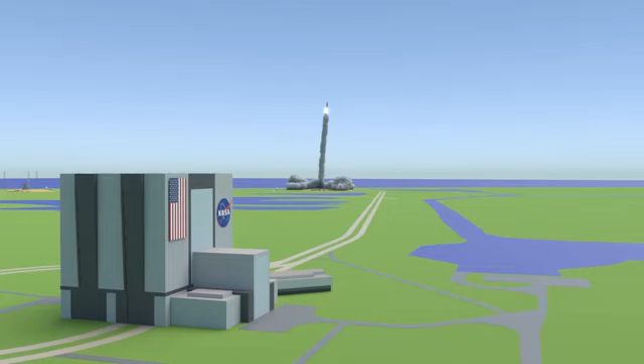In this video, I want to show you how they launched the space shuttle. We'll look at all the preparation beforehand, then the details of the launch pad, and then their 8.5-minute journey into space.

Sadly, the space shuttle is retired. It no longer flies. However, I think it's still really important to learn about. After all, some of this technology is still being used for space programs.

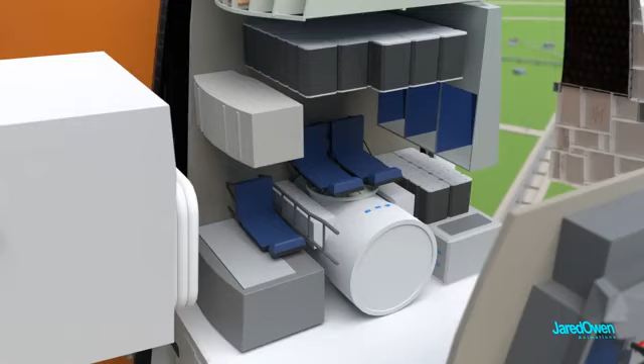In preparation for this video, I read a few books. One of them was called Riding Rockets, and it was written by 3-time astronaut Mike Mullane. He does a good job of capturing what it was like to ride on the space shuttle. I reached out to Mike and he was really helpful. He made a lot of good suggestions for what to include in this video.

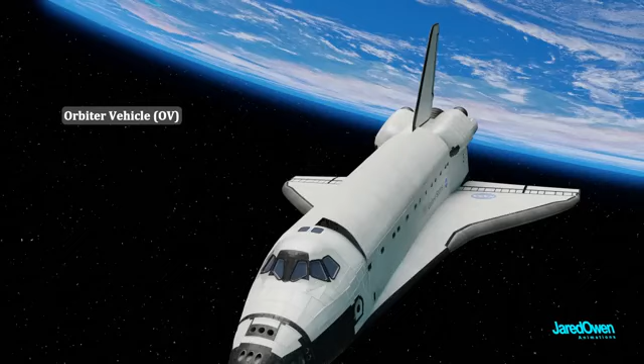Though before we get too far, let's review. This is the orbiter vehicle, the part that looks like an airplane and carries the astronauts and payloads into space.

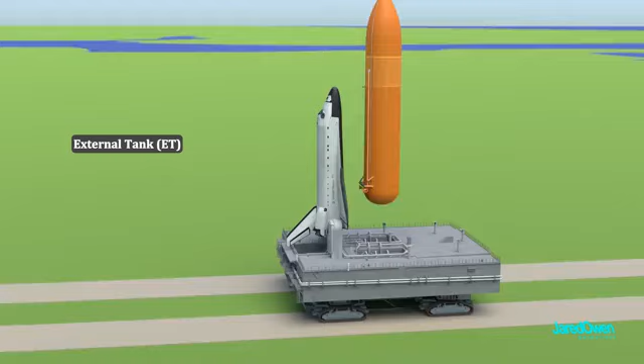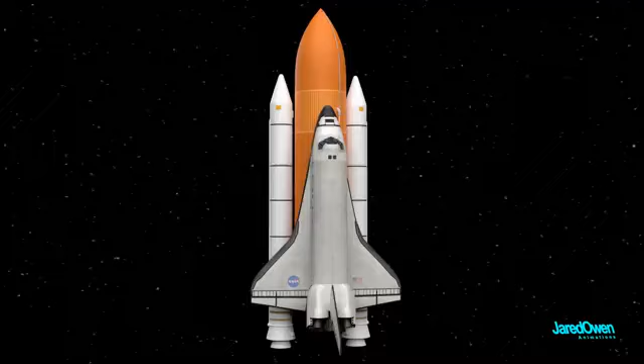It takes so much fuel to get into space that we need a really big gas tank. That's what the orange external tank is for. It provides the fuel for the 3 space shuttle main engines. Even this isn't enough to launch us into space. We need 2 extra rockets, one on each side. These are called the solid rocket boosters, or SRBs. It takes a lot of work to get all of these pieces ready for the launch.

There were 2 launch sites for the space shuttle: Kennedy Space Center in Florida and Vandenberg Air Force Base in California. Shuttle launches from the Vandenberg site ended up being canceled, and as a result, all 135 shuttle missions were launched out of Florida. So let's take a closer look at Kennedy Space Center in Florida. It has 2 launch pads, 39A and 39B. Shuttle missions were launched from both of these pads.

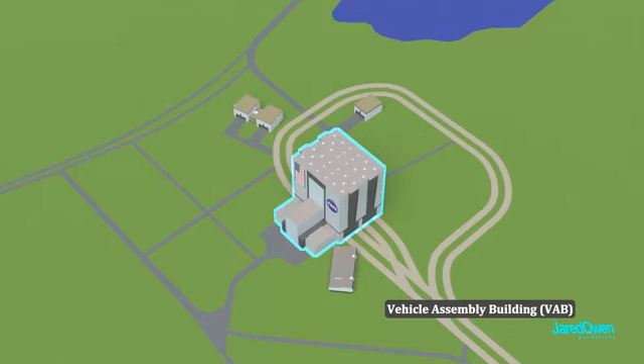There's a few buildings way over here, about 5 kilometers away from the pads. The large one here is the Vehicle Assembly Building, or VAB. It's as tall as a 52-story building. This is where they would assemble the space shuttle in preparation for a launch. Next to it is the Launch Control Center. Notice how it's positioned with a good view of both launch pads.

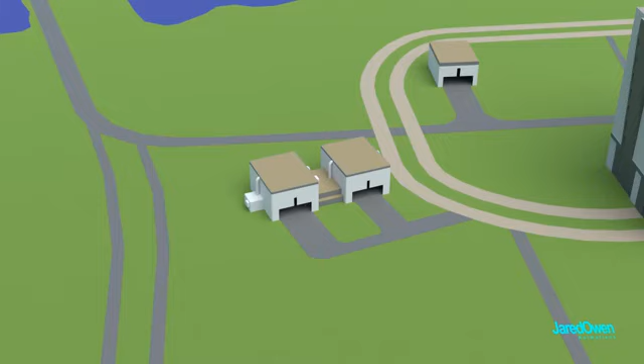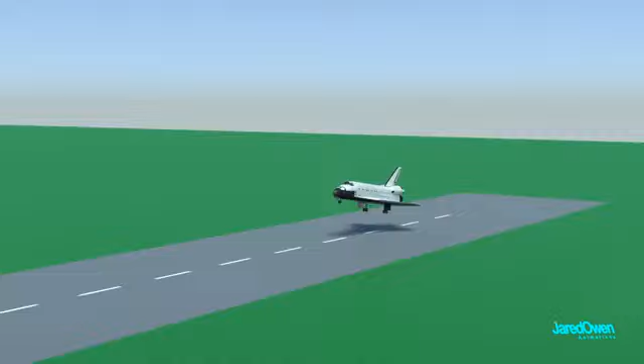This building is called the Orbiter Processing Facility, or OPF, and actually there were 3 OPF buildings. It's where the orbiter was serviced in between missions. Over here is the Shuttle Landing Facility. This is where a mission ends for the space shuttle. But they didn't always land here. Sometimes, due to weather or other circumstances, the shuttle would land in California at Edwards Air Force Base.

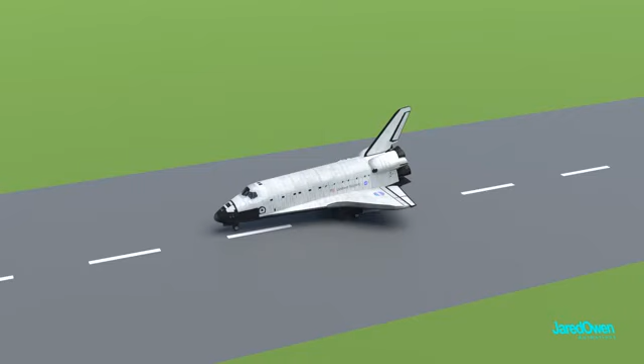When this happened, we need to get the orbiter vehicle all the way back to Florida, and the shuttle can't really take off again and fly like an airplane. It wasn't built for that. So here's what happened. The orbiter vehicle was taken to the Mate-Demate device, or MDD, which would lift up the shuttle and then load it on the back of a special airplane called the Shuttle Carrier Aircraft. It was then flown across the United States to get back to Kennedy Space Center in Florida.

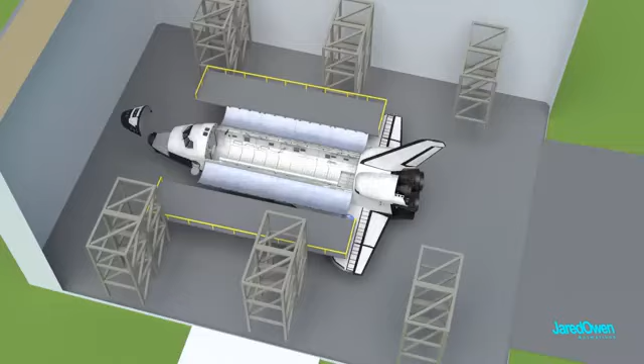It was then taken to one of the OPFs. Once inside, the engineers would literally crawl all over it to fix or replace many of the shuttle components to make sure that it's safe to fly for the next shuttle mission. This process can take several months to complete. This is part of the reason why the space shuttle was so expensive.

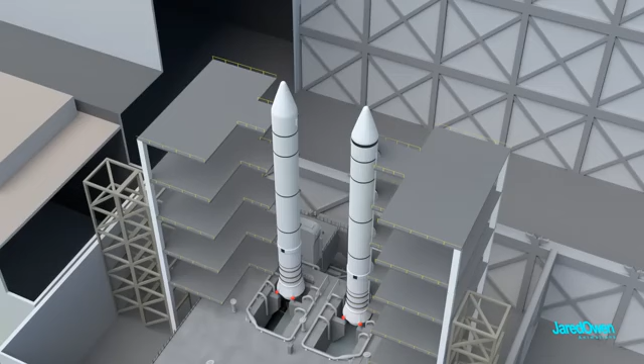Meanwhile, work starts over here at the VAB. We start with the solid rocket boosters, which are assembled piece by piece. On the inside is the solid rocket fuel. Once ignition starts at liftoff, it cannot be turned off. Now it's time to lift the external tank into place. Inside, there are 2 smaller tanks, one for liquid hydrogen and one for liquid oxygen. These tanks will remain empty until just a few hours before the launch.

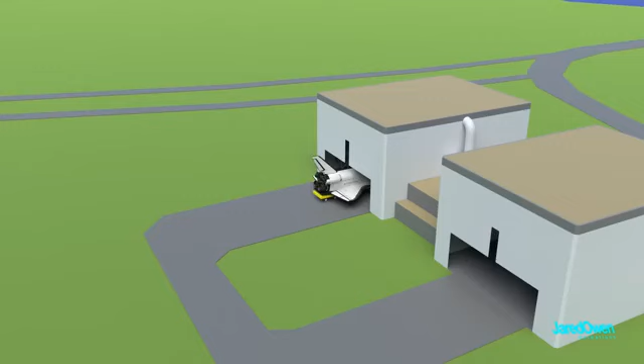Now at room temperature, hydrogen and oxygen are both gases which take up an enormous amount of space. But if we put them at extremely cold temperatures, they will turn into liquids and we can put a lot more fuel inside of the tanks. The liquids from each tank will flow through pipes down to where it will connect to the orbiter. This side is for the liquid hydrogen, and this side is for the liquid oxygen. Once the orbiter was ready, it was then transferred from the OPF to the VAB. This was referred to as a rollover.

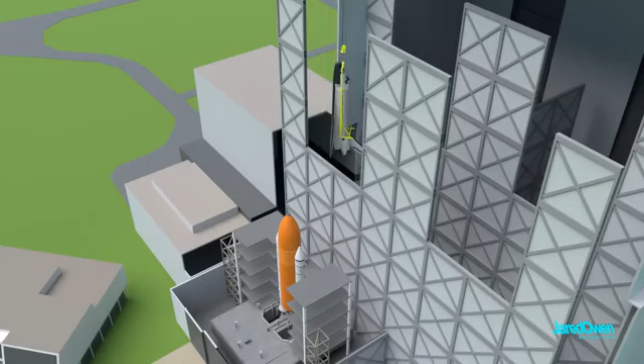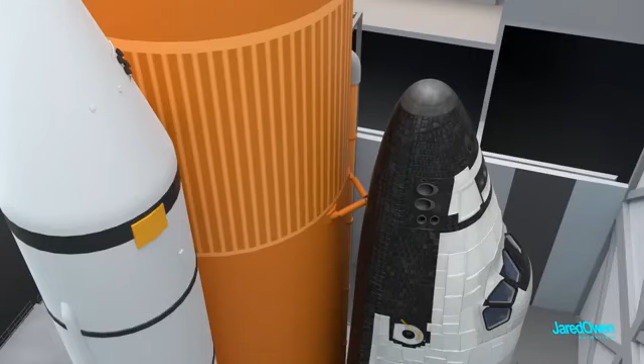The orbiter was then hooked up to a crane and then carefully lifted up, moved over to the high bay, and then mounted to the side of the external tank. The fuel and electrical connections are attached to the bottom of the orbiter. There is also another attachment point up towards the top.

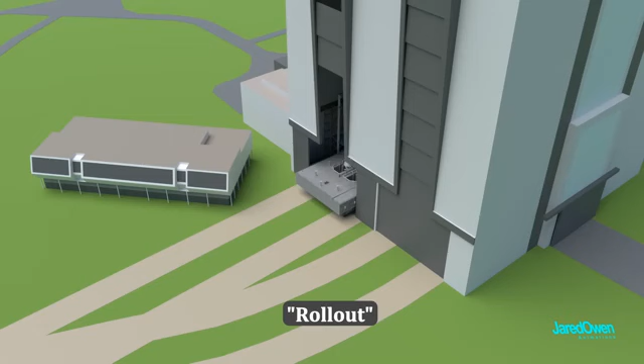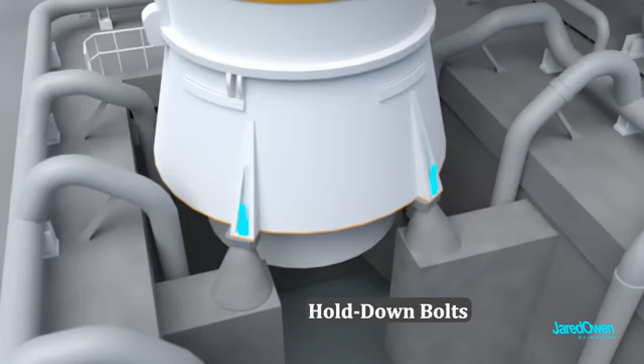Once this is all ready to go, we need to move it to one of the launch pads, which are more than 5 kilometers away. This is referred to as the rollout. The weight of the entire shuttle stack is supported at the base by 8 hold-down posts, 4 on each of the SRBs. It's then secured in place by the hold-down bolts. At the moment of liftoff, these will detonate to free the shuttle.

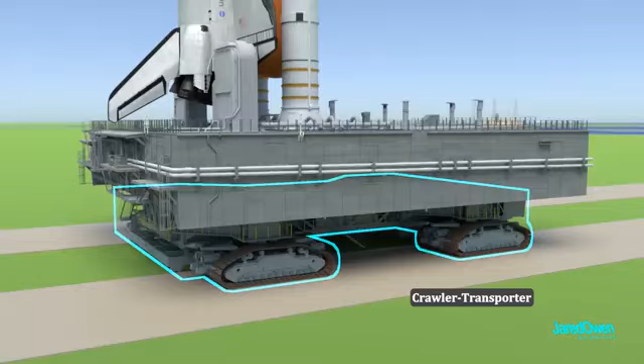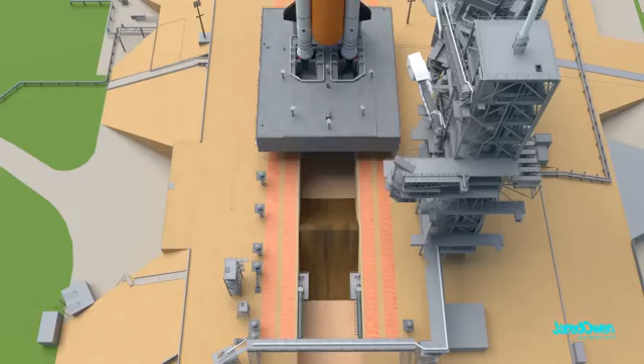The platform it's on is called the Mobile Launch Platform. Underneath is the crawler transporter, which moves everything at just under 1.5 kilometers per hour. It takes many hours to get all the way to one of the 2 launch pads. Then it's up the ramp and slowly into position. The platform is put down on supports, and the crawler goes back down the ramp.

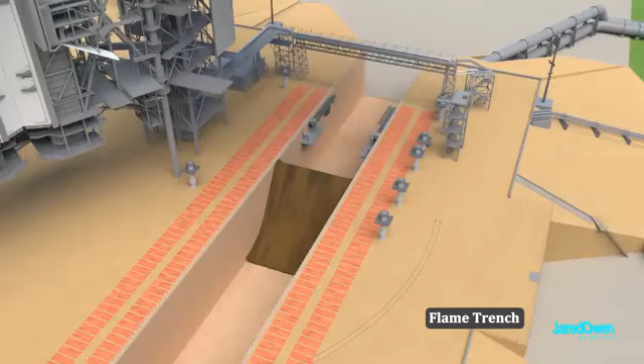The mobile launch platform has large holes for the rocket flames. The 3 main engine flames will go through this hole, and the flames from the 2 SRBs will go through these 2 holes. Below the pad is the flame trench. During the liftoff, the flames will be deflected to each side.

The structure next to the shuttle stack has 2 main parts: the fixed service structure, which doesn't move, and the rotating service structure, which can pivot around to completely enclose the space shuttle. Sometimes the payloads were loaded here in the vertical position, and other times they were loaded before this, when the orbiter was on the ground at the OPF.

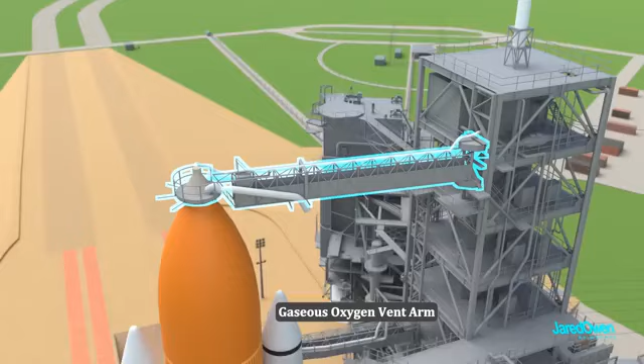The fixed service structure has a lightning mast on top, and then 3 service arms. 2 of them are vent arms, which will collect excess hydrogen and oxygen from the external tank. This is the gaseous hydrogen vent arm, with the ground umbilical carrier plate at the very end. At the top is the gaseous oxygen vent arm. Because the fuels are so cold, the beanie cap is really important to prevent ice buildup at the very top.

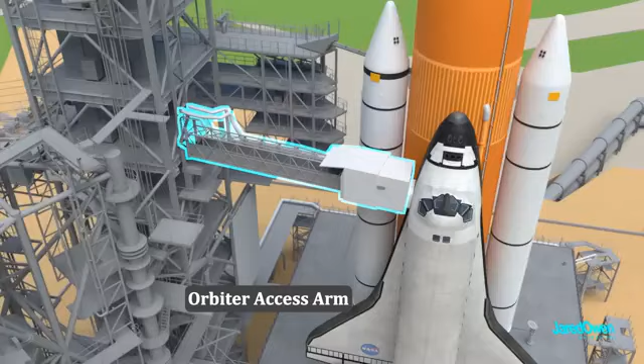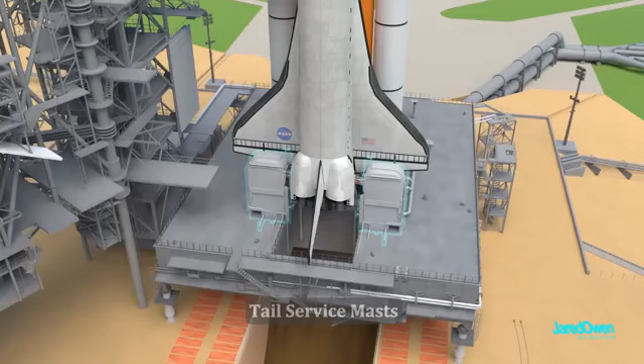The third arm is called the orbiter access arm. At the end of it is the white room. This is how the astronauts get on board the orbiter in preparation for a launch. Down here are the 2 tail service masts. They have connections to each side of the orbiter. On the day of the launch, this is where the fuel will come in to fill the orange external tank.

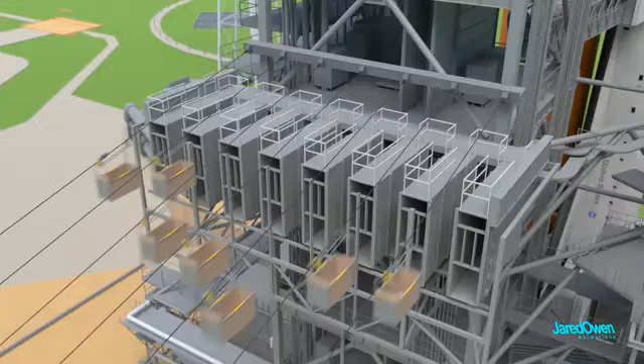If there is an emergency on the launch pad and the astronauts need to get away in a hurry, they will come over here to the emergency egress system. It has several baskets that can quickly carry them far away from the launch tower. Each basket can hold 3 people.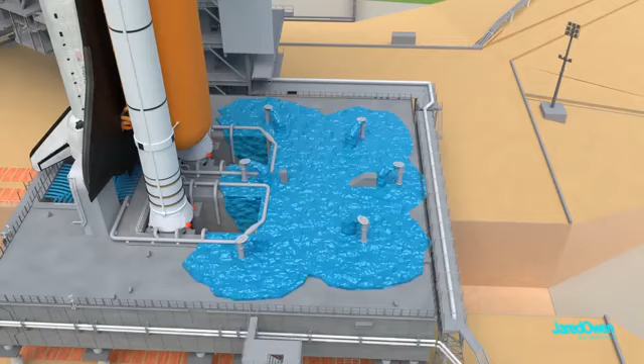One more feature of the mobile launch platform is the sound suppression system. Beginning at just a few seconds before launch, water will start pouring out from a few different places. This will limit the sound shockwaves from bouncing back up and damaging parts of the space shuttle as it leaves the ground. The water is stored in this large tower on the launch pad.

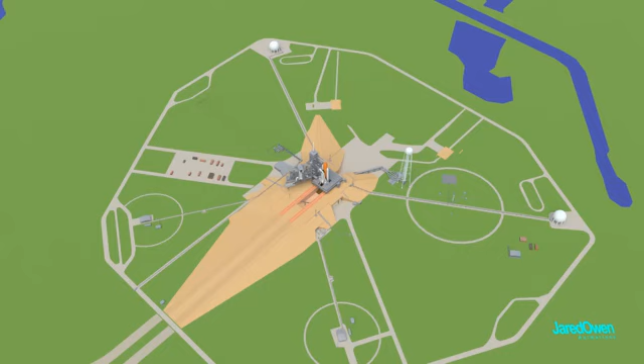So let's see how this works on the day of the launch. There are many things that have to happen in order. I can't cover them all in this video, but let me show you some of the main ones. At T-minus 5 hours and 35 minutes before the launch, fuel begins loading into the external tank. The fuel comes from the white spherical tanks on the edges of the launch pad. Remember that the SRBs already have their solid fuel inside of them.

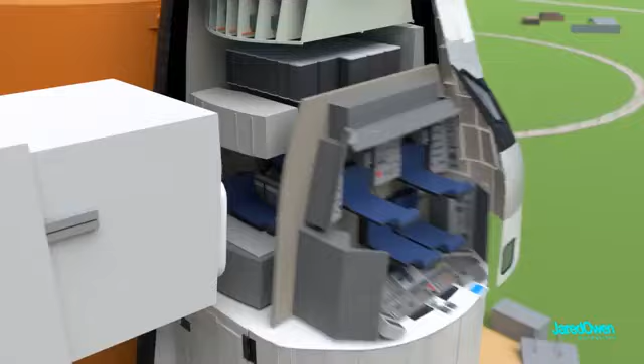At T-minus 3 hours, the astronauts leave for the launch pad and begin to enter the orbiter vehicle. Since the shuttle is vertical on the launch pad, all of the seats are in the laid-back position. Most missions had 7 astronauts, 3 in the middeck and 4 in the flight deck. There are no windows on the middeck, so some of the astronauts won't be able to enjoy the view on the way up.

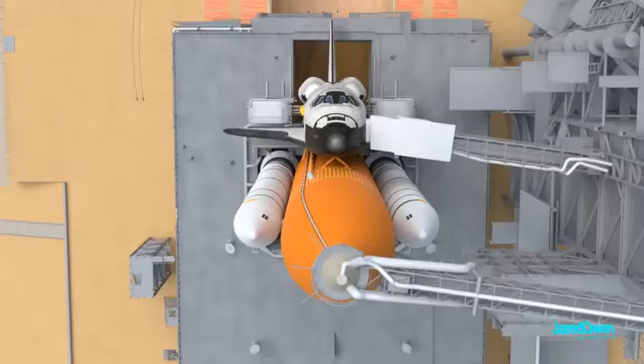There's a lot of excitement coming up to the moment of liftoff. However, if there are any problems such as mechanical failures or even bad weather, then the launch will be delayed or even canceled until another day. This is called a launch scrub, and it can happen all the way up until just a few seconds before liftoff.

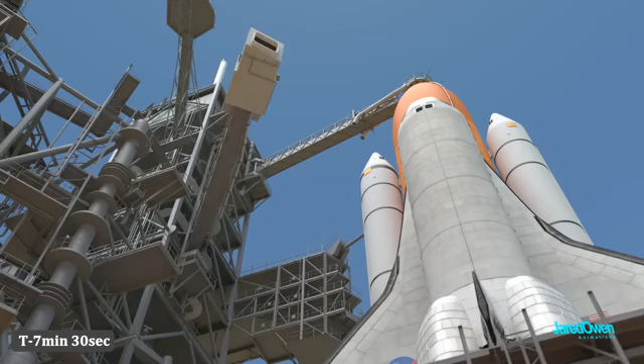At T-minus 7 minutes and 30 seconds, the orbiter access arm is slowly retracted. If there is an emergency, they can quickly bring it back into place. At T-minus 3 minutes and 45 seconds, the main engine gimbal tests to make sure that it's working correctly. T-minus 2 minutes and 55 seconds, the beanie cap is lifted and the gaseous oxygen vent arm is retracted.

At T-minus 10 seconds, activate the hydrogen burn-off system. And no, this does not actually start the engines. That happens up here inside of the combustion chamber. What these sparks do is ignite any excess hydrogen. This hydrogen can cause an unexpected explosion at launch if it isn't taken care of.

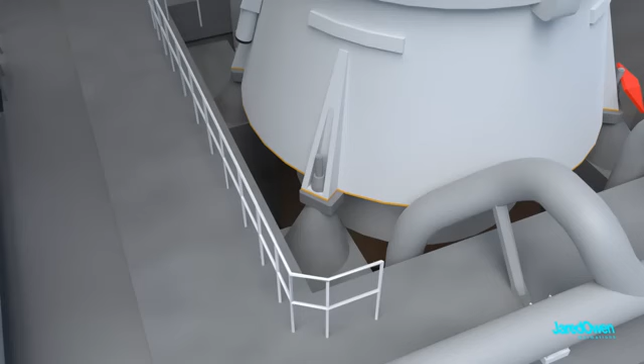At T-minus 6.6 seconds, the 3 main engines ignite. All 3 of them must work correctly or they will shut down and abort the launch. At the moment of liftoff, many things happen simultaneously. The gaseous hydrogen vent arm is retracted from the external tank. The 2 connections at the tail service mast will retract. The 8 hold-down bolts will detonate, which frees the shuttle, and then both SRBs ignite.

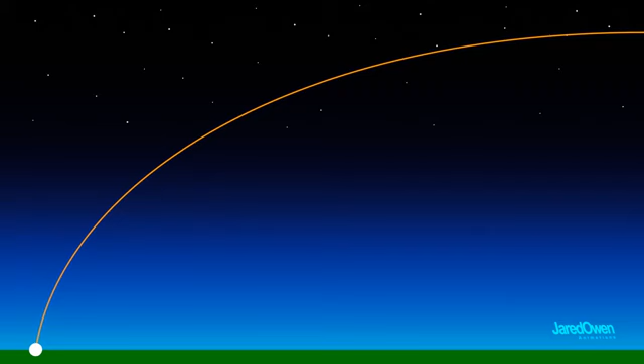For their journey into space, the shuttle is mostly flown by the autopilot. Of course, the astronauts can still take over if they need to. Shortly after clearing the tower, they do what's called the roll program, to get the shuttle so that it's heads down for most of the ascent into space. This reduces the aerodynamic stress on the wings. It will also allow the astronauts to see the curve of the Earth as they ascend into space.

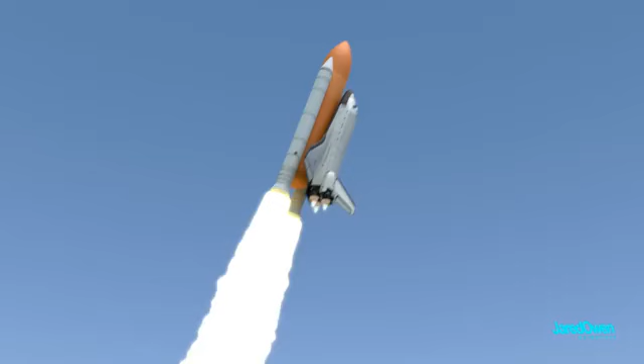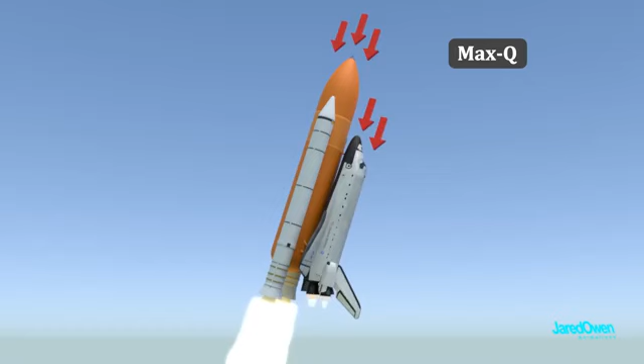Now, as we keep gaining more and more speed, the air in the atmosphere will create pressure on the front of the spacecraft. Then as we get higher, the air starts to thin out. They use the term max Q to refer to the time when the aerodynamic pressure will be at its highest. During max Q, the main engines will be throttled down, so we don't accelerate too quickly, but then shortly after we can throttle them back up again.

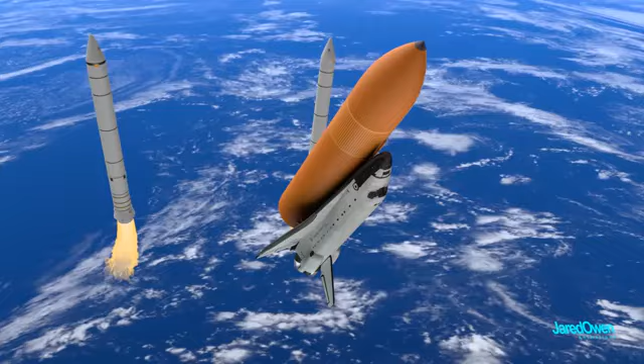A little more than 2 minutes after liftoff, the 2 SRBs have done their job. They are detached, and then small rocket motors on the bottom and on the top fire on each booster to ensure that they are separated from the vehicle. The SRBs fall back down to the Earth where they will parachute in for a soft landing in the ocean. They will be recovered by boat and then refurbished for a future shuttle mission. Now the 3 main engines are on their own.

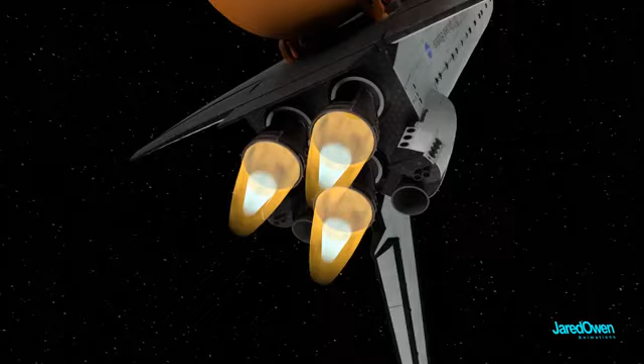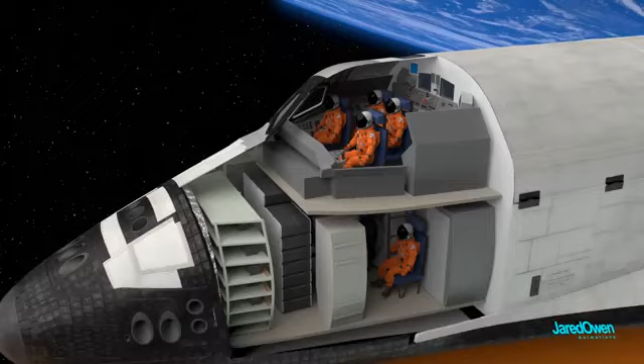As we get higher, more and more fuel will be used up from the external tank. This means that the shuttle will keep getting lighter. We have to keep throttling down the engines or we'll accelerate too quickly. The maximum amount of acceleration we want the astronauts to feel is 3 Gs, or 3 times the force of gravity pushing them into their seats.

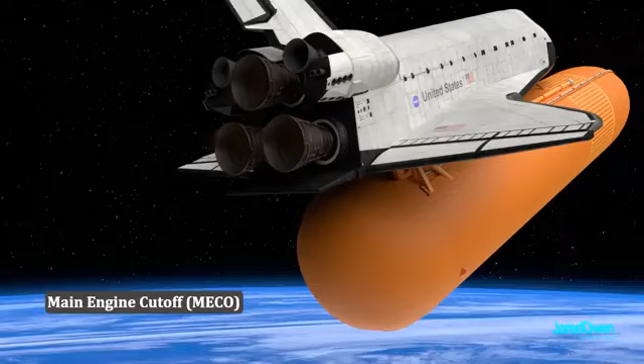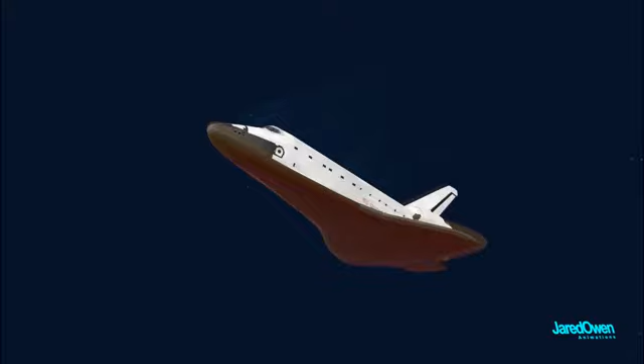At about 8 minutes and 30 seconds, we have main engine cutoff, or MECO. This must happen before the tanks run dry so that the engines aren't damaged. The external tank is now detached. We're not in orbit yet, so the tank will head back down to Earth and burn up in the atmosphere. The 2 doors on the bottom side of the shuttle will close now that the external tank is gone. If they didn't close, we would have gaps in the heat shield at the end of a mission, which would not be so good.

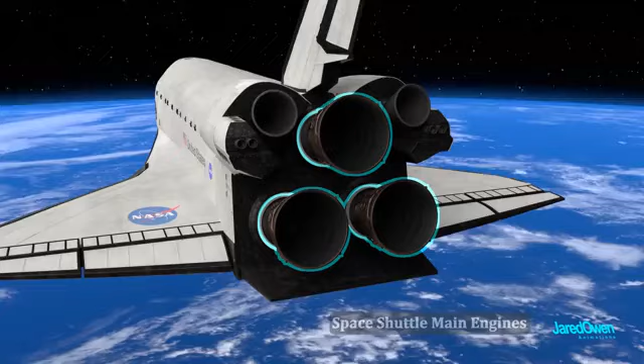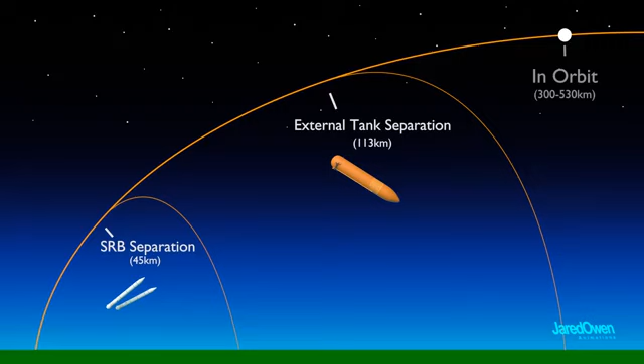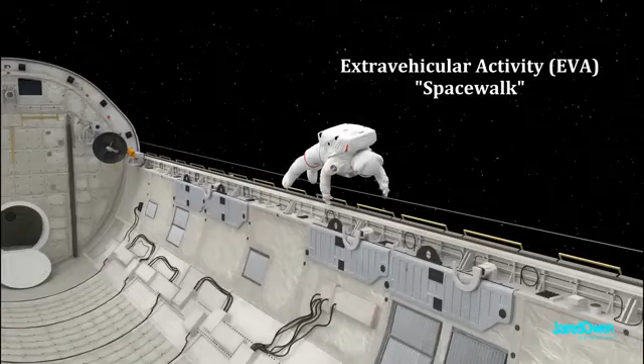At this point, the orbiter vehicle is on the same path as the external tank. We're not quite going fast enough to stay in orbit around the Earth. Remember that the external tank had the fuel for the 3 space shuttle main engines, so we can't really use these anymore. Instead, we'll use the 2 OMS rocket motors. These each carry their own fuel inside of the pod here. This gives us that last push into orbit around the Earth. Now it's traveling at 28,000 kilometers per hour, many times faster than the speed of a bullet. Now it's time to do some science, release a satellite, or dock to the International Space Station.